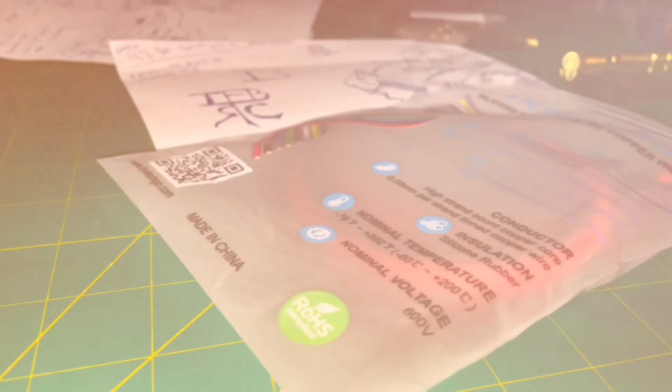Let's dive into it. Yes, it was handed to me in person.

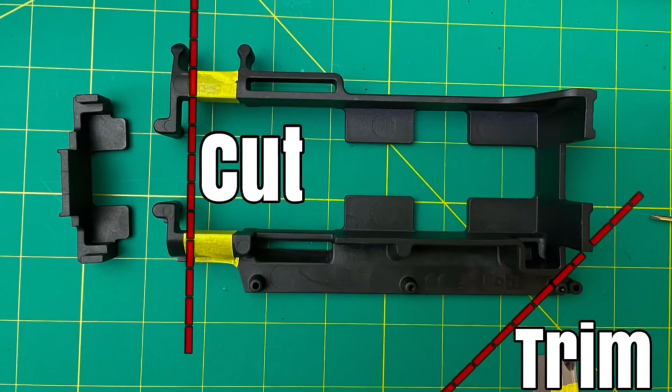So you're going to need some actual tools to do this. This plastic is really strong, so I got this air-powered Harbor Freight tool. You can see it's basically a hacksaw, like a handheld hacksaw, and you need one of these bad boys. Extremely efficient, gets the job done. No matter what you're doing, it's going to take care of it, but it's just not going to give you that flat of a surface.

Where are my files? You can have these files here, right? Got the coarse file, then finish it with the finer file, and it gives you a finish like this. Look how nice that is. You get the point, right? Really nice, smooth finish. You don't gotta worry about sandpaper going through all those grits. Just use these files, they're good for a lot of things.

Get those little burrs off.

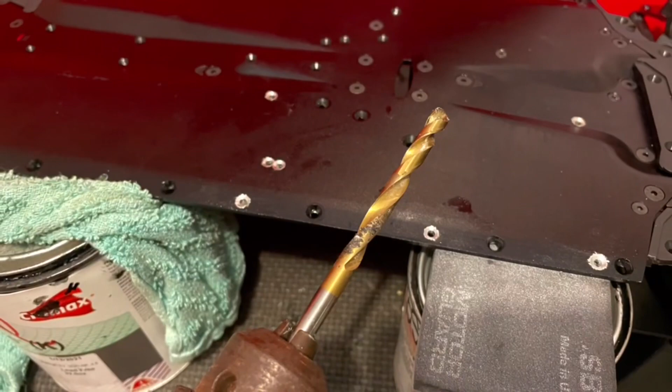Ram Jam Racing's 8mm titanium spool shaft with custom hardened ultra-strong 4041 tool steel cups. The 8mm titanium spool shaft is precision ground and the flats are machined perfectly parallel to prevent gear wobble, mated to our custom ultra-strong 4041 tool steel cups. This spool is ready for a serious beating for use with many aftermarket spur gears.

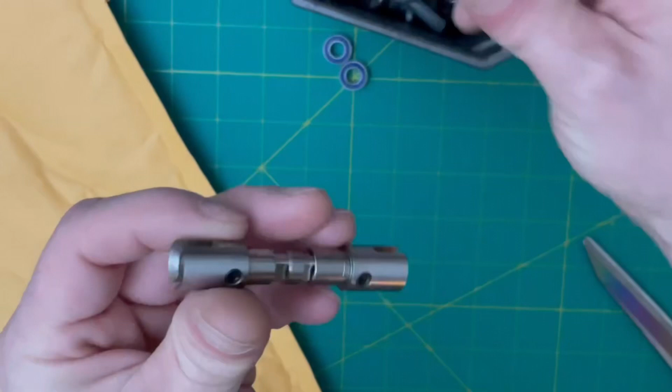Includes spacer combinations for the stock Arrma spur, Saga RC spurs, and many other spur options. For anybody questioning the fitment and assembly of this Ram Jam titanium spool kit onto your factory Arrma Felony, Infraction, or Limitless, let's see what the details are. The Arrma Infraction 6s titanium center spool fits the factory Arrma motor mount, no modifications required. The cups clear without issue and will not mark the mount.

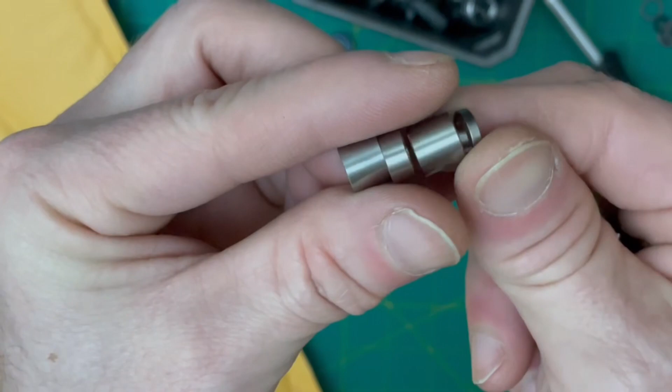Last but not least, let's go over all the parts included in the Ram Jam titanium spool kit: a Grade 5 titanium center spool shaft, Grade 5 titanium spur spacers for stock and Saga spurs, 2x 4041 tool steel cups, 2x hybrid ceramic bearings, 5x8mm x 2mm shims, 4x O-rings, and degrease. Do not forget to degrease everything once you've opened the packaging, especially the ceramic bearings, and lubricate them with proper bearing oil. You also want your Loctite to adhere to the threads on the grub screw and drive cups, so be sure there is no residual oil before getting to that point.

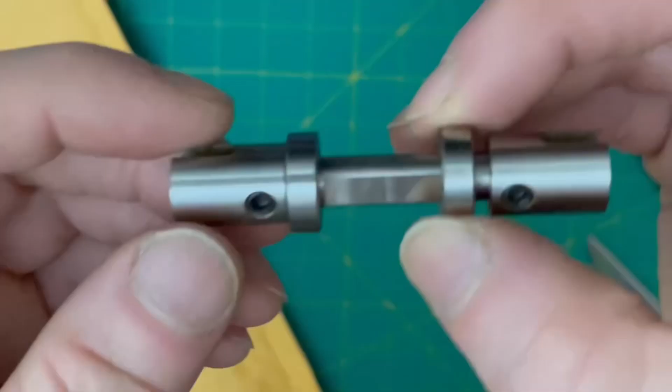The next part we're going to be unpackaging is from Scorched Parts, being a carbon fiber top brace. Let's check out the details on that.

Scorched Parts carbon fiber center brace for Infraction and Felony models will also fit Limitless, but see below. This center brace not only does the job of the stock center brace, but stiffens the whole chassis by bolting to the center diff mount and adding torsional rigidity with laterally solid mounting front and rear. There is some fabrication you are going to have to do to one of the plastic pieces on the front end of your RC car, but I will explain it in detail when we get to that point and you will get to see.

Last but not least, we have Island Hobby Nut's signature Ironman RC titanium drive shafts with a 10mm diameter, and they fit without having to remove your rear lower brace, but you will want to remove some material just to be safe. The front lower brace does have to be removed, but that can be corrected with the Scorched carbon fiber top brace.

Okay, if we're going to be technical, let's at least be fair about it. I've done this test in the past where I rolled a pair of aftermarket shafts on a ruler and found a surface defect on one of them, and I had more upset people than people with questions or answers. So if I'm going to take that route, I have to be fair about it, transparent, not biased.

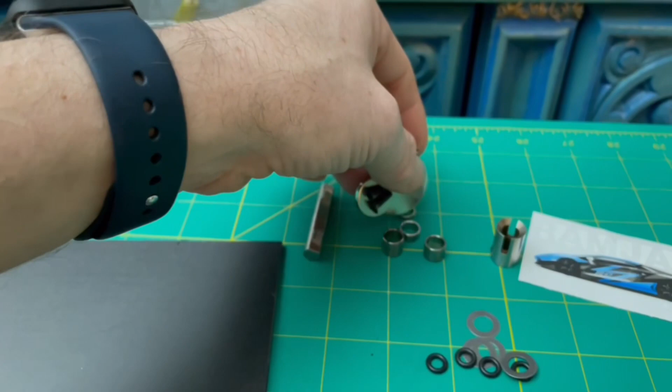To also clarify the type of metal, we know this is titanium, not stainless steel, by its color. These sleeves or spacers are also titanium. These drive cups are hardened steel. These spacers are super magnetic, and these washers are also going to be made of steel. That's strong. Now these shafts, we know they're titanium, and these pins are hardened steel, not stainless steel. I apologize if I said that somewhere at some point, or maybe I was talking about another pair of identical shafts, but these are hardened steel, you can see that, just to get that out of the way.

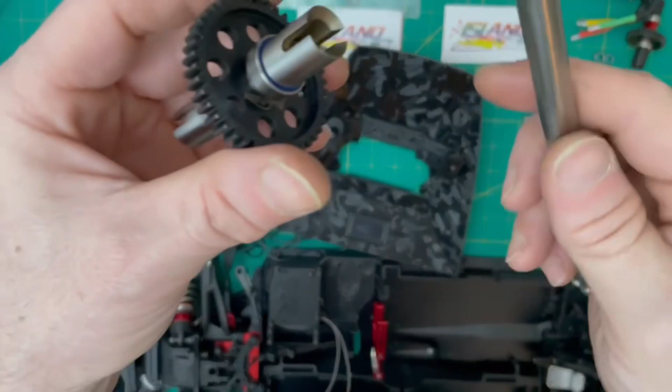So if you're wondering how the Island Hobby Nut 10mm Arrma titanium shafts fit into the Ram Jam titanium spool set, which I think has ceramic bearings—this is a Power Hobby gear you're looking at, it's an oversized spur, so it fits. Look at that. Little play, little deviation, no resistance.

This O-ring that is remaining, I am going to use it inside the rear input diff cup, because even though this one is a little bit longer than the factory one—and if you want to know by how much, it's about 1.3 millimeters—there's still quite a bit of play, even with the spool and everything in. So I'm just going to throw this in. Here's what the clearance looks like with the O-ring in there. You can see it, that's about where it puts it, somewhere in the middle. So we're going to put the spool in and see where we're at with it.

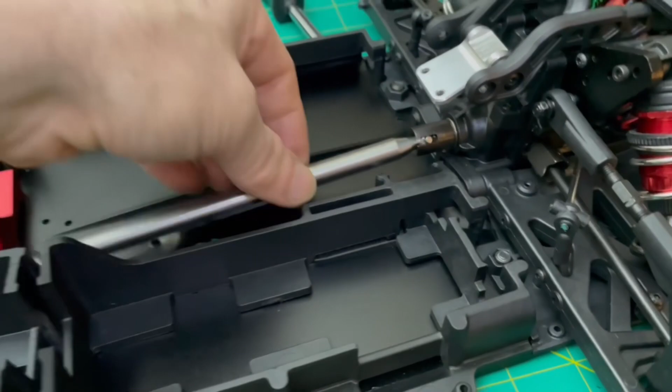There's a little bit of play in the front, but I'm happy with it, about 1 millimeter on each side. The rear shaft has slightly more play still. If I had one more O-ring, I'd try putting it inside of the diff cup, but for now, we're good. I could probably put this on this cup instead, because the spool cup runs a lot deeper than this rear one here, the stock one.

This is the rear mounting bracket for the upper brace support. This piece did not need to be removed, so it will be reinstalled. In this time-lapse portion, you're seeing me try to figure out how this piece goes on here, because it really didn't come with instructions, and it was a little frustrating at first.

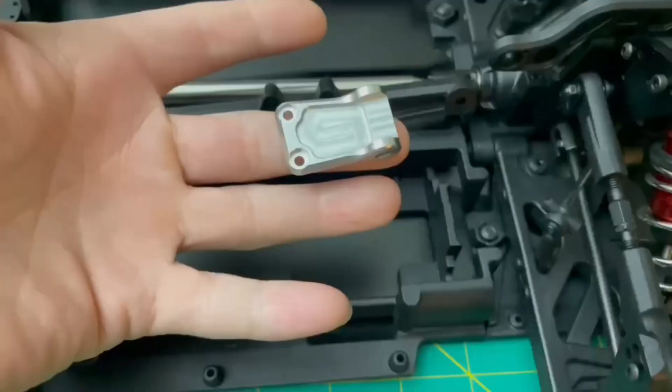This piece, I don't think it needed to be removed. It comes this way, facing up, flat side down, and this is going to rest on top of the brace. You have to use this, because without it, this piece is just going to slide back and forth on the screw. You will have enough material to shave off for this to fit nicely in here. So there it is in place, and it's not bound up, it just needs more clearance.

Once you pull this out, you can see that there's not much material removed as it is, so you have a lot of room, and this is pretty thick. As for the front, you are not going to be using it.

See this tiny little gap? You have to fit this to that gap, and it's not happening. This is not going to go back in there. You might get lucky if you're using an aftermarket servo mount that you are going to reposition and take it out of the way, but this is not going to go in there. That's bye-bye. It's going to line up just like that.

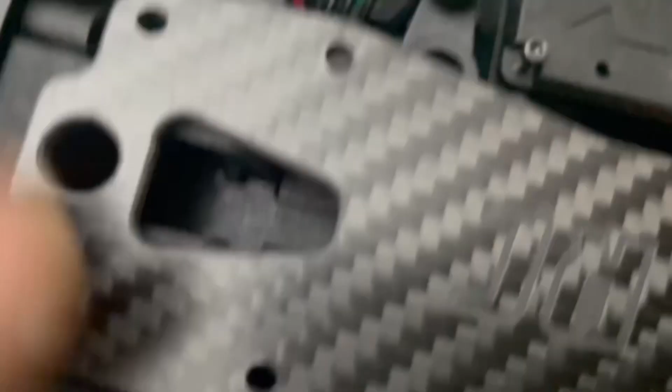And this is what it looks like on this end. You have to use this brace, or you just cut the head off and use it as a spacer, because this scorched top brace does not come with that. The kit I received only came with this aluminum piece and this bag of parts. This aluminum piece below would have been very helpful, but my kit did not come with it.

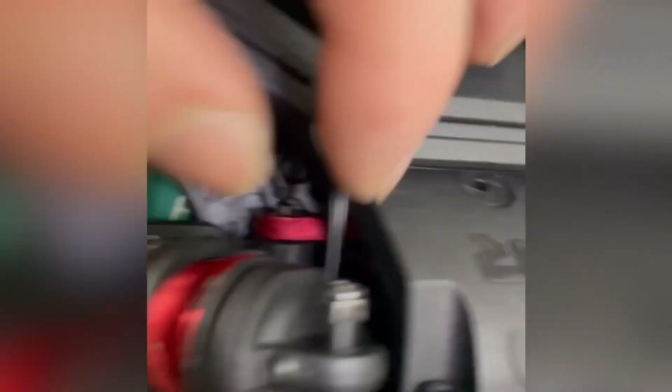What I'm gonna do is grind and cut off this top hump right here that's no longer gonna be utilized, and use this as a flat bracket spacer or adapter to let this come down and meet flush there. So having an accessible wrench, Allen key, you take that off, this just comes right out. You don't even got to pull those pins out or these long screws. Just be sure that you do not lose your little washers that go here. These just block off the top, and grind it down.

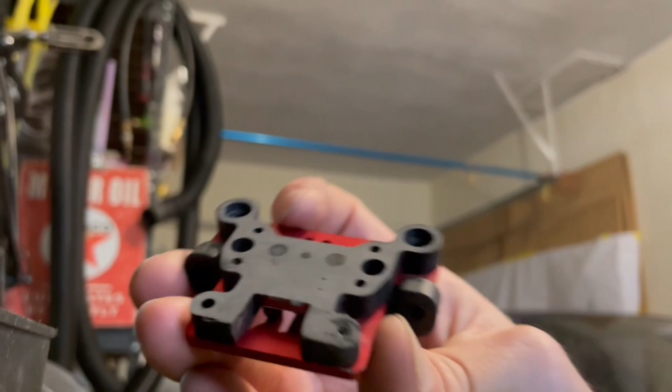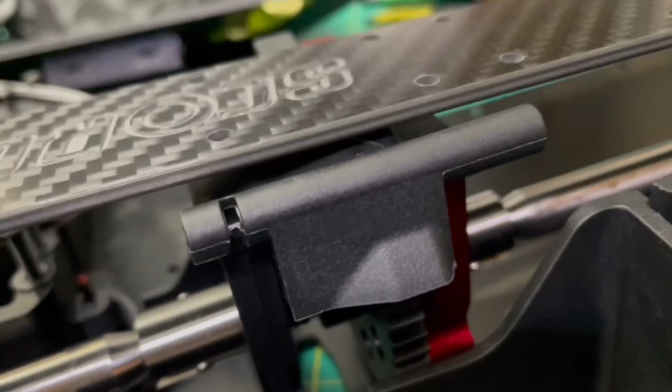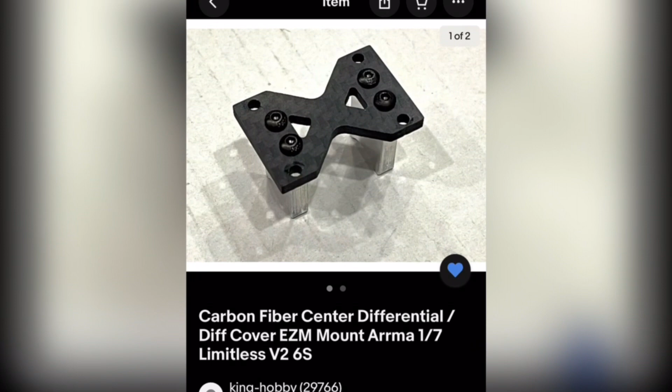Like new, except for that little edge. And in order to get this to come down and meet flush with that, I got to take out the factory motor mount cover, because this doesn't work with it. And it doesn't tell you that anywhere. I don't see any parts that work together with this for me to be able to use this. So these are two different style aftermarket motor mount covers that will work with the existing motor mount. This will allow the scorched top brace to function properly, as it will allow enough clearance.

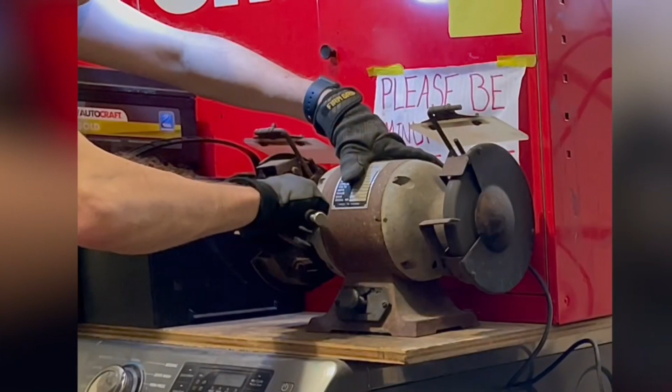Well, with the exception that I actually made contact where I did not intend to. It's already starting to look ugly, but we have contact. Here.

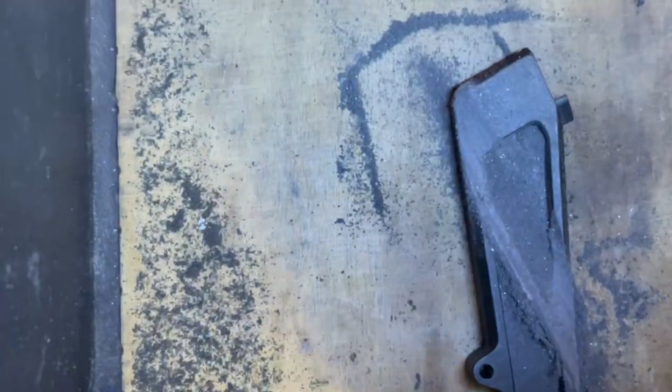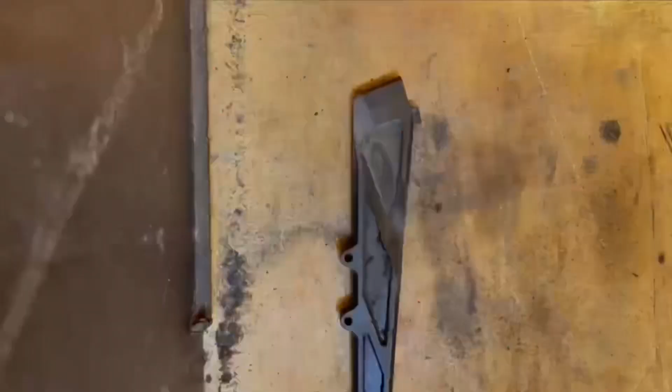Looks like I could remove some more here. Alright, so this went well. This didn't take too long.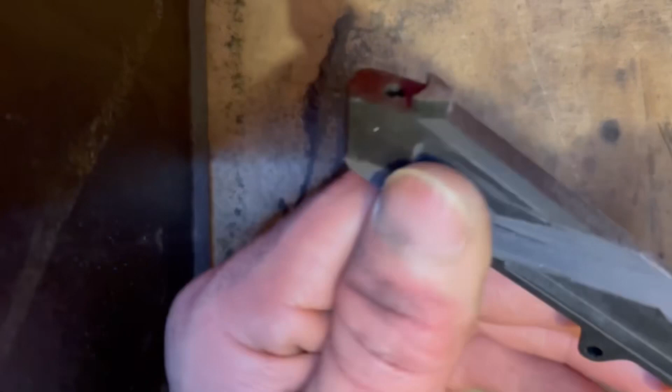You can see that from here, it's perfectly aligned. We just want to be sure that the shaft, the Arrma drive shafts from Powerhobby, which are the ones that I'm using, the 10mm shafts, we want them to be centered. So let's go check that out, and if we need to remove more material, we will remove it. But we've done good.

Let's see how much clearance. Okay, so here we are with the lower rear brace again. I've been working on it for some time, and I was able to remove plenty of material between the Dremel and the sandpaper with the aluminum rod like you've seen.

It looks like I have enough clearance, but I want a little bit more clearance, and I want to flare it out on the edges. It's deep enough, but on the very edges, I don't want it to continue wrapping around the shaft. I want to flare it out, and then I'm going to smooth it out with some wet sandpaper. I don't need to go deeper. What I need to do is just go a little bit wider.

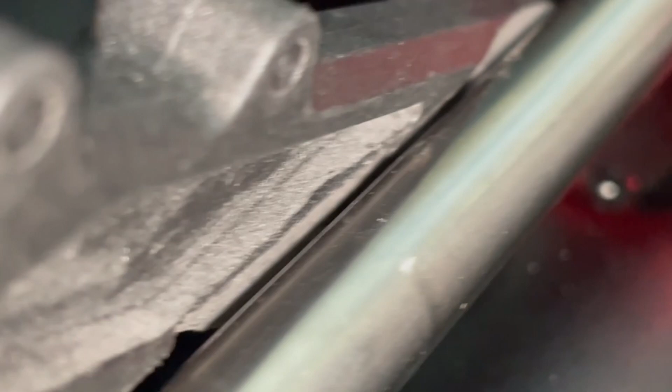So we're back at it. Let's get some light in here. So the reason it looks so smooth and clean to where you're seeing it is because I brought it all the way down to an 800 grit wet sand. Started with 80, went to 180, 320, 800 wet sand, and then I washed it and rubbed some bearing oil into it to restore it.

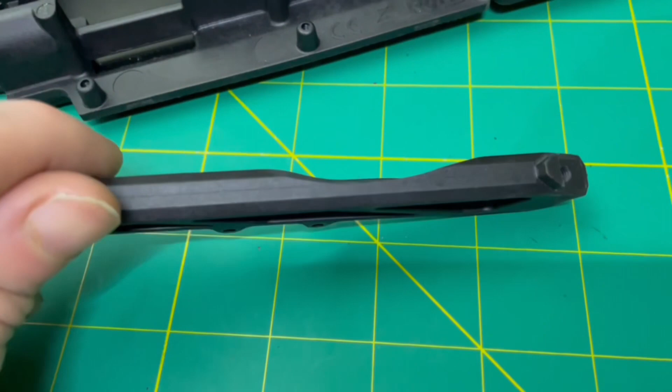So there you have it. And it's also flared out. You see how it's got a smooth transition. It's just not a cut into it. I flared it out. It's flared out.

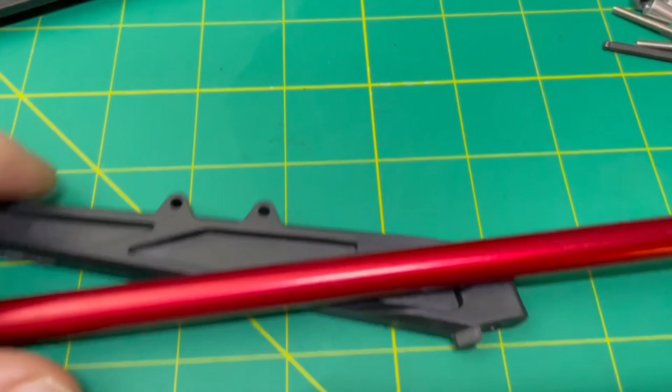So our Powerhobby Arrma shafts, they are 10mm. This is about 10.5. And you can see it's wider than what it needs to be. And we know it's deep enough because before doing anything to this, it was still in stock form. Without doing anything, I already had clearance.

It wasn't even touching. In here, let's see what we're working with after all this elbow grease. Check that out. This needs to move over.

Look at that. We got plenty of depth and we got plenty of width. We're not coming anywhere near this shaft. Look at that, you can almost look straight down it and see the bottom. Look at that, I think we did a great job.

You guys did a great job on this brace. Congratulations, guys.

So the front standoff, identical to that one, has been cut off like you seen earlier in this video, and I block sanded it and smoothed it out. Now the scorched carbon fiber top brace can come down flush.

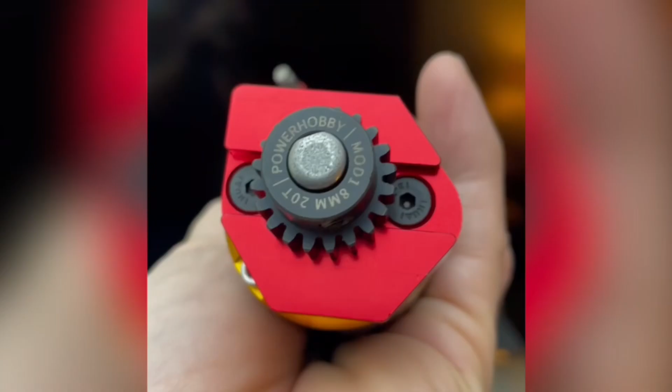Now let's talk about the different motor plates. The one that comes on the Limitless is a different motor plate than the one you get on the Felony and the Infraction, so let's take a look at some of those differences.

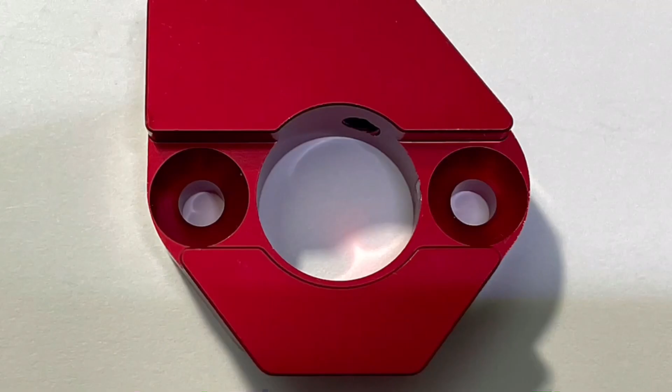Now here is the motor plate for the Limitless. It is going to position the pinion gear further away from the spur, allowing you more room to run a larger pinion gear for speed running.

Now this next motor plate is the one that comes on the Felony and the Infraction. It brings the pinion gear closer up against the spur gear, allowing you to fit smaller pinion gears for lower gear ratios. I will do my best to post product link descriptions in the comments below for both of these motor plates, as it is difficult to distinguish them when shopping for them because these details are not specified. It will only tell you Felony or Limitless.

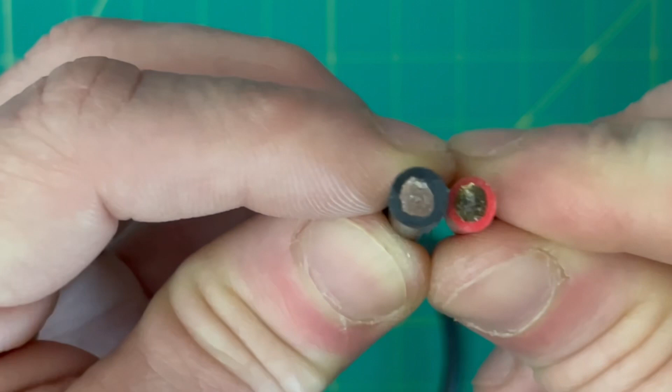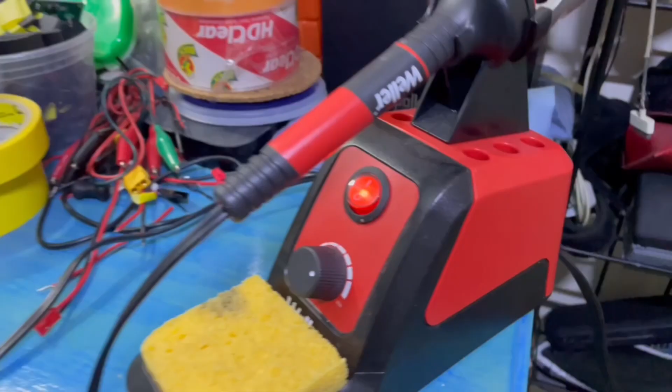This is a Weller iron. I wouldn't use anything other than a Weller because it's just what I'm familiar with. The station is capable of handling up to an 80-watt iron, but this iron is only 60 watts. My dial for this, I don't have it all the way up, and it was more than enough heat than what I needed.

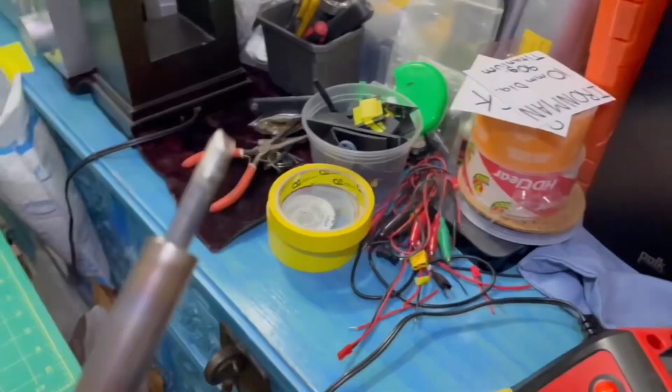I don't want to put too much in this position because I don't want it running down the wire.

You see how the heat was already compromising what's on there from the factory. That didn't take any effort at all.

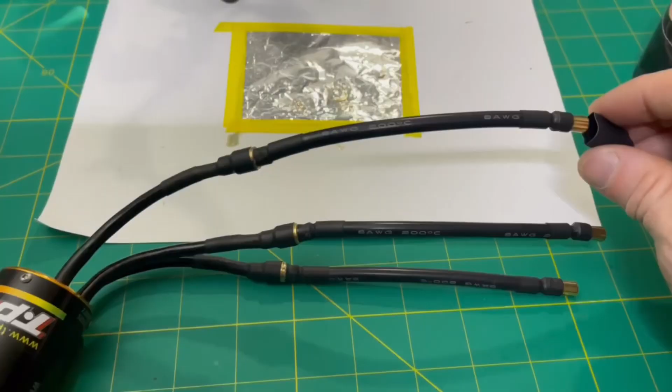Should be enough tolerance to let this plug in.

You're gonna use the wire loom. If I don't do it right away, I'll do it early on. I just don't want to put a piece of shrink wrap over that.

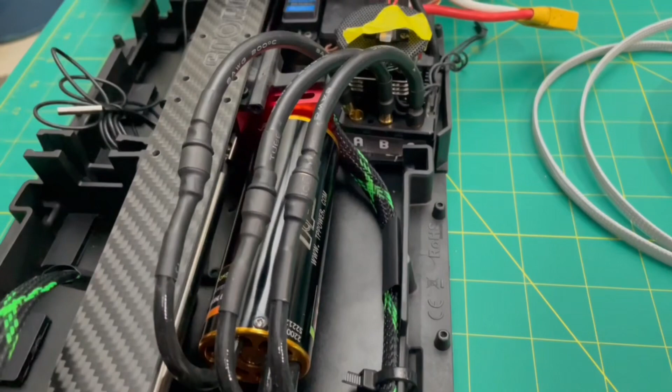So this is where we're at. This took a very long time. It always seems like it's not a big deal - they're just 3 wires with a few connectors, but that's never the case. There's always a lot of technicalities that come up, and proper planning is needed to not make any errors.

So this is just the Mamba Monster X. It's a 6S rated ESC. I've pulled about 200 amps out of it, so I know I can use it just to mess around with the car and just get things moving. But I'm not gonna bash with it or drag race or anything like that.

This wire loom was not a large enough diameter to go over these 8mm connectors, these plugs, whatever, so I'm fine with that. I'll grab some more stuff in the future and I'll redo it. I don't know so much about this color pattern, and it's too large for the wires that are running in here, and I'm also thinking about redoing this.

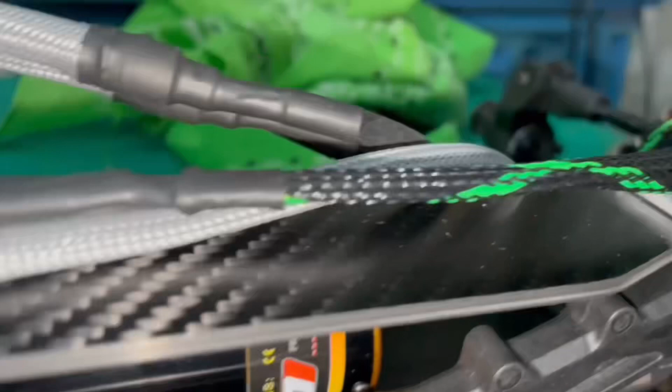So changing this mount, this upper brace from the factory one that sits higher up to this low profile scorched carbon fiber one, it changed the gap difference between the engine bay and where it rests on the bottom. So these 3 extra pieces of PVC board that you see that I've cut and glued on there is to make up for the difference.

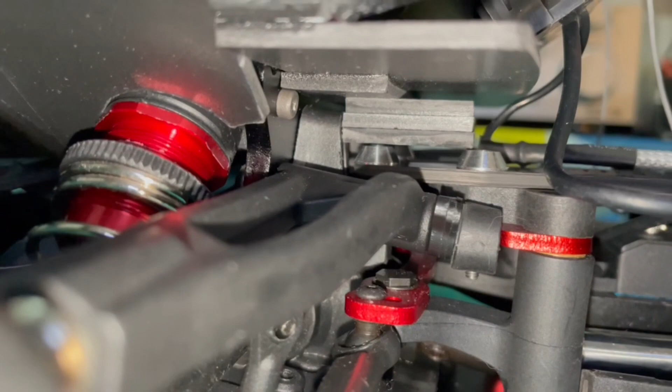And it still sits slightly lower. I mean, it's less than the difference of the width of another one of these - that's 3 millimeters, which is just gonna create a slight separation between the bottom of the hood and here. And that's still okay, because I can make up for that difference with a very thin type of padding that I have, a more aggressive weight.

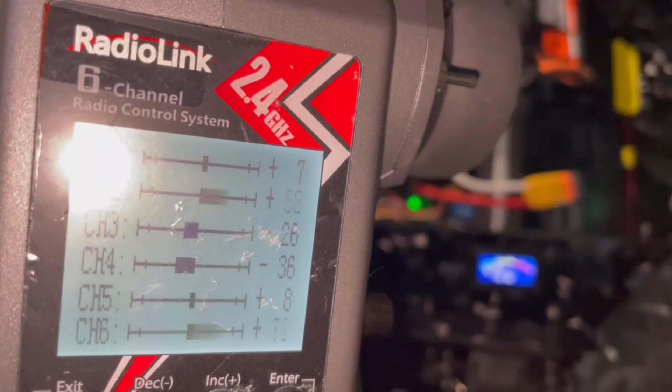These Hobao wheel hexes and the nut aren't locking nuts, so I have to use thread lock.

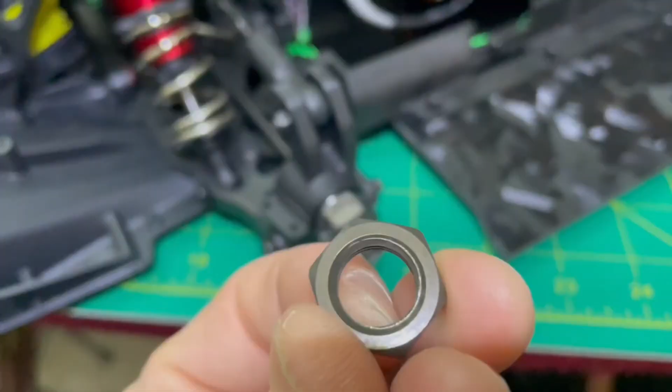I got a little temporary piece of tape in the back of the motor to cover the vents for now. I'm gonna put my fully charged 3S packs on here, running a TP4070 2200 kV CM motor and a Mamba X6s. I have it geared low, running a 42 spur on a 20 pinion. It's geared just about 100 miles an hour on the ground, not on calculator.

So everything should turn out just fine. Let's give it a couple revs and see. This is the current setup right before taking it for its maiden run. It's a little messy, not as clean and organized as I wanted, so I'm obviously going to be taking care of that in the near future. But for now, this is how it's looking, just so I can get some logs and see what's happening, making sure this Mamba X6s isn't going to go up in flames. Let's get to it.

So that was the animated turbo sound that I made using a turbo keychain. I'll make another video in the future showing you guys how I did that for those who are interested. But right now I'm trying to figure out why these lights are flickering at the touch of the throttle, and they're even flickering when the speed control's idle beep goes off, which shouldn't be happening. It could be the cheap little mini speed controls, but I'll figure that out in the future. Let's get out there and see what this does.

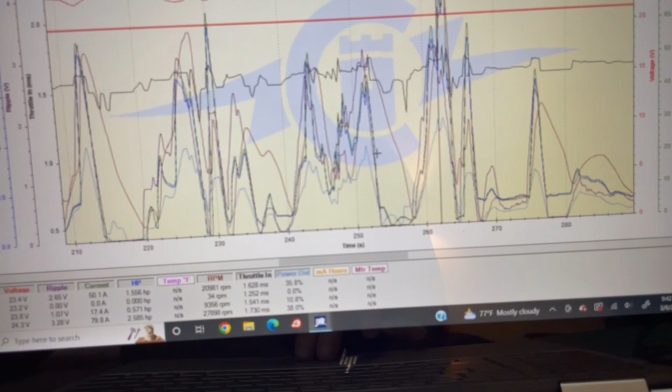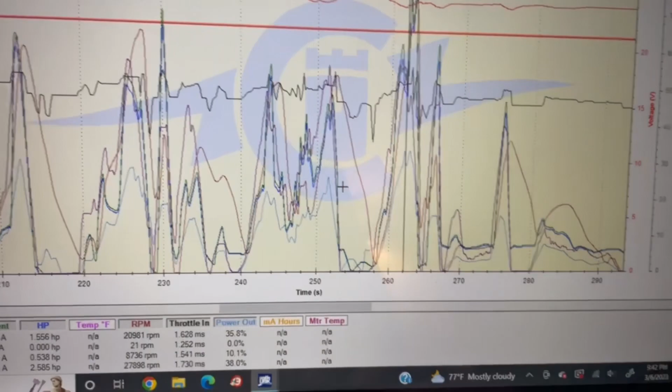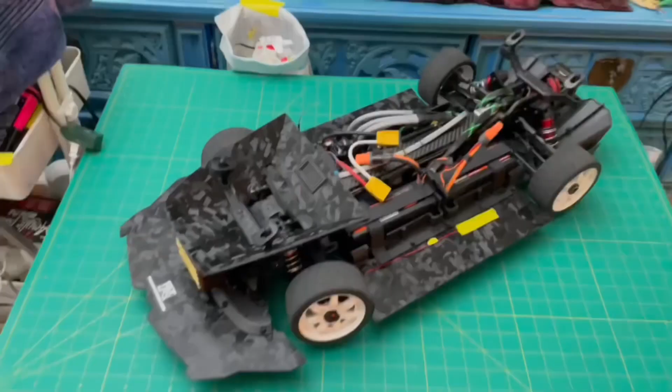It's like 130 miles an hour maybe, so on the ground I'm predicting 100. So excited for this car. 3, 2, 1. Oh, I say I'm not gonna hit you, don't worry.

I'm back outside at one of my better locations. This is the first time that I'm going to open this up. This is the third time I'm driving the car, but I haven't been past 60%. So today we're going to try to go 100% throttle on the Mamba X6s on the TP4070 CM 2200.

So let's go. This is the current setup. Just never mind these black wires, this is for the underglow, I just wanted to have it for tonight. And I have these fans that I'm trying out. They seem to be working. They don't blow that strong, but I'll compare them to a better set of fans that I have when we get to that point. This is just last minute here, but we'll get a good look at this once it's all finalized.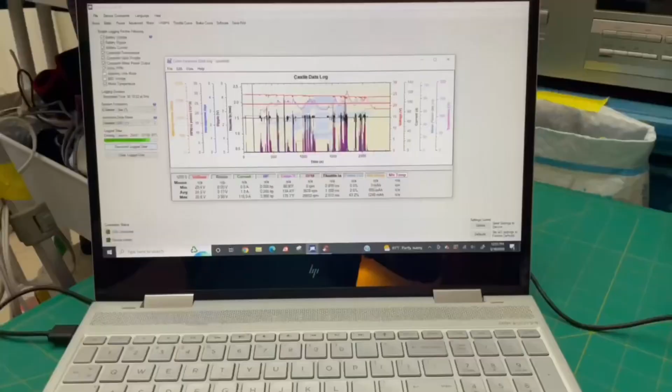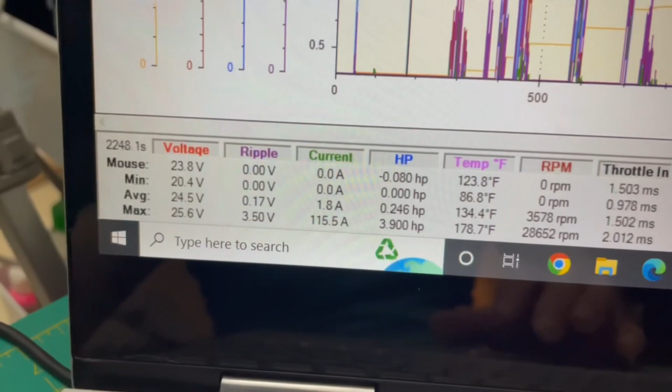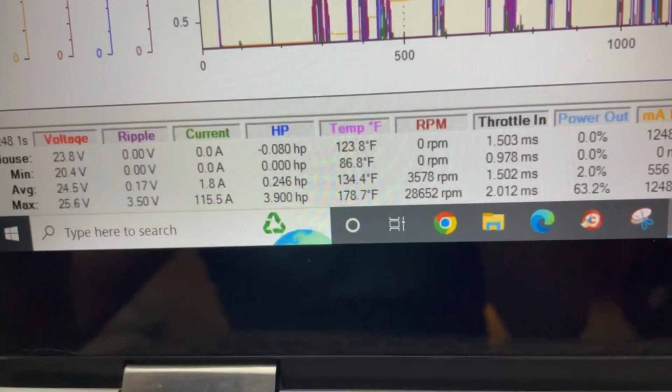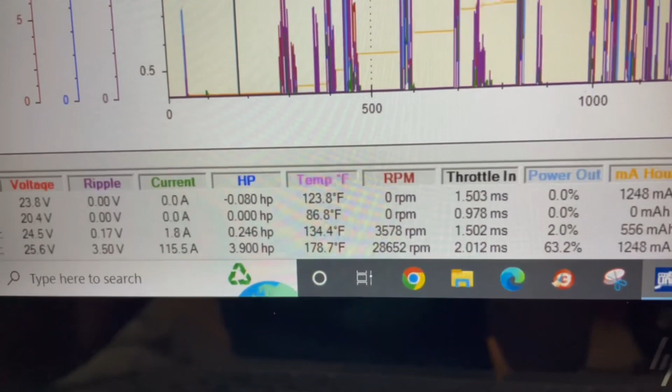Okay, let's blow this up. What am I looking at here? Okay, so that's not too bad. I mean, any ripple is not good. Wow, 3.9 horsepower, 4 horsepower basically. That's not bad, 4 horsepower at 115 amps. And check it out, the speed control temperature did not exceed 178, but it reached 200 on the maiden run.

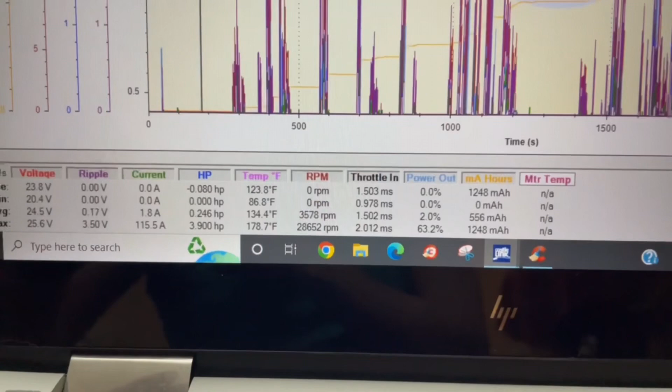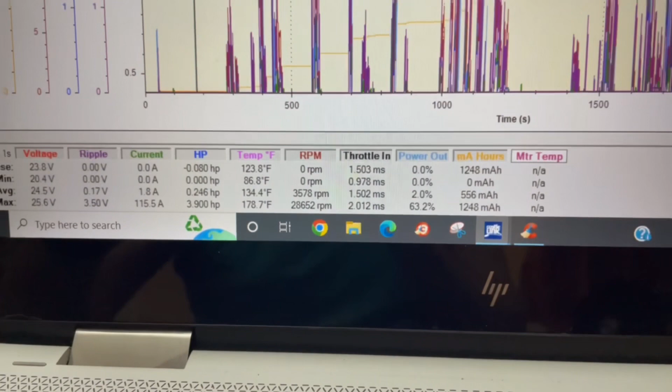And on the maiden run, I didn't push it as hard, and the speed control got 200 degrees. On the previous one, where I did those digs from a dead stop, look at that, motor RPM are the same. 28,000 RPM, which is pretty much exactly what I got on the first maiden run. Power output 63%. I think my power output last time was maybe about 48 or 50%.

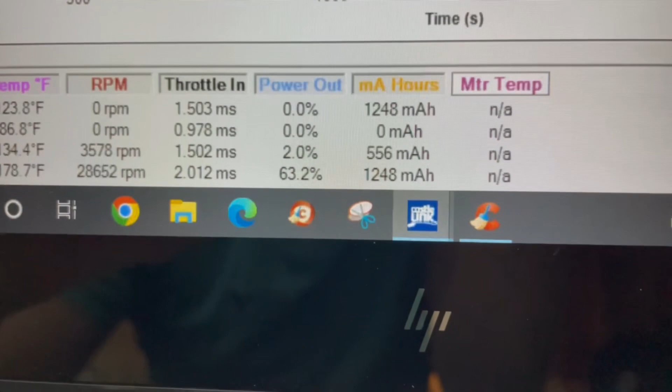Milliamps, not even 2000 milliamps. That's not too bad. Perfect.